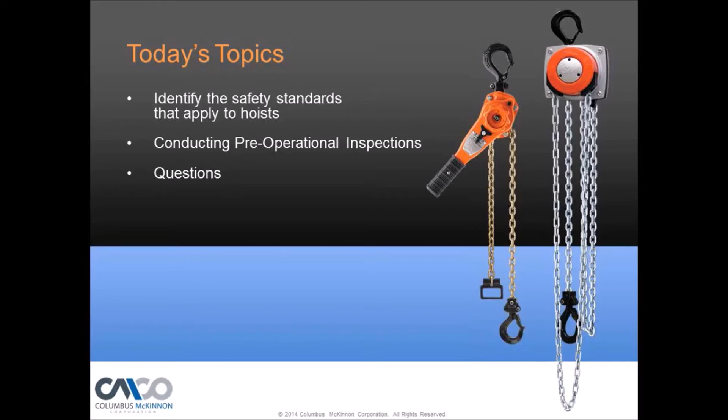All right, so let's get into the safety standards that cover hoist. I like to always start off with this because where do these safety standards come from, and how do I find out more about inspection of my equipment? The number one thing is to get the owner-operator's manual for the brand of hoist that you have and the company that made that hoist. That's the start, and then you want to refer yourself to the industry standard.

So if it's an underhung hoist, it's ASME B30.16, whether that hoist is electric, air-operated, or a manual hoist. And a lot of people don't realize that some of those large electric hoists fall into the same category as the small manual hoist. So whatever you do with the small manual hoist, you have to do the same thing with the large electrical or powered hoist, I should say.

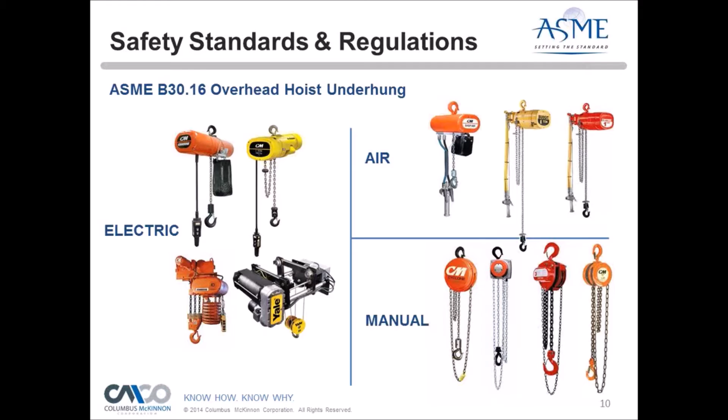For lever-operated tools, they fall under a different spec. It reads fairly close to the 16 spec. It is B30.21 for lever hoist. Whether you have a chain type, wire rope type, sometimes we can have a synthetic—instead of chain, we'll have a synthetic, almost like a synthetic sling for the lifting—and so that would all fall under B30.21. And it's important to know what standard your hoist equipment is.

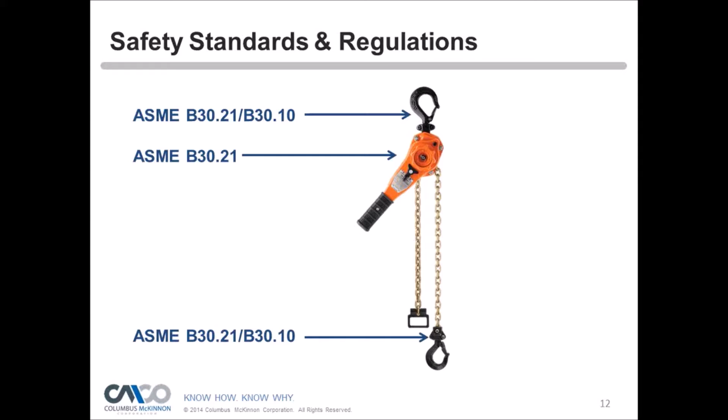It's interesting to note that when you look at a hoist, there are multiple standards that apply to it. So here, just a simple lever tool, we have B30.10 for the hook inspection and 21 for the lever hoist. So sometimes there are multiple standards for one piece of equipment, so you would need two standards to reference for the operation and inspection of that unit.

Let's look at a fairly simple crane, which is a jib crane here, which falls under the category of a monorail or an underhung, and that falls under the category of B30.11. So the inspection of that equipment would fall under B30.11. The hoist would still fall under 16.

And then if you look here, we've got B30.10 for hooks, slings, 9, 20 for below-the-hook lifting equipment, rigging hardware, 26. So we've got a whole library here of things that need to be looked at as far as inspection is concerned.

And the reality is your operator should be looking at that equipment prior to doing any lift, especially the rigging equipment. The pre-operational inspection of the jib and the hoist only have to be done at the start of the shift, but your rigging equipment should be looked at as well.

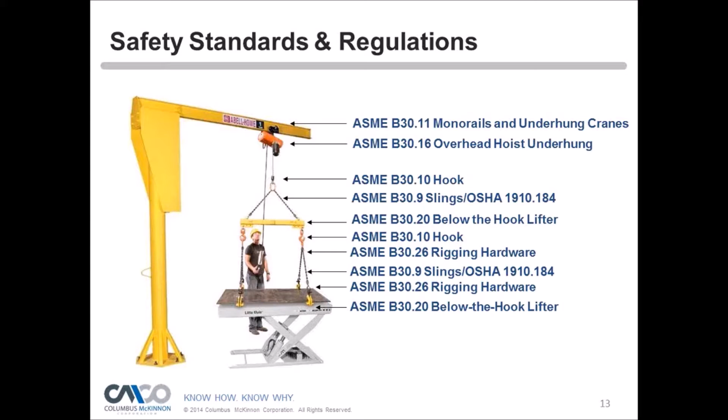So let's start the pre-operational inspection, what your operator should be doing. There are two general classes of inspection, and I want to briefly go over those so we don't mix up what this type of inspection is.

We have the frequent, also referred to as a pre-operational inspection. Records of these inspections don't need to be kept. You do them, train your people to do them, and we highly recommend they do it at the start of every shift. Obviously they're going to be on the ground, so visually they'll look at what they can see from there.

How does it differ from a periodic inspection? A periodic inspection is a very detailed inspection, and records must be kept. This is where someone actually looks at a chain hoist link by link, or the wire rope hoist through the entire rope, maybe gets up on a scissor lift and looks at the mounting and the torque and everything like that, and documents it—crosses the T's, dots the I's. That's what the periodic inspection is.

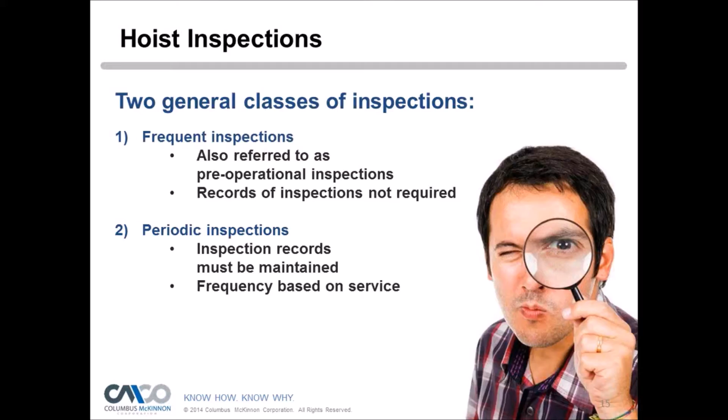How often do you need to do periodic inspections? For normal service, if you're lifting less than 65% of rated loads 15% of the time, you want to do an annual inspection. Heavy service, if it exceeds that normal service, at least twice a year. And in severe service you want to go quarterly. Severe service is abnormal operating conditions you wouldn't normally see—chemicals, heat, extreme cold, caustic environments, anything not normal. Then you want to look at that four times a year and document that periodic inspection.

Latches are required on hoisting equipment unless it constitutes a hazard, but for the most part they're required. Without the latch you might think everything's okay, but the hook could be starting to stretch, or it was overloaded—so the latch is a good indicator of that. It draws my attention and raises some concern, so I'd want to bring that to the attention of a competent person, someone trained to inspect or maintain this equipment.

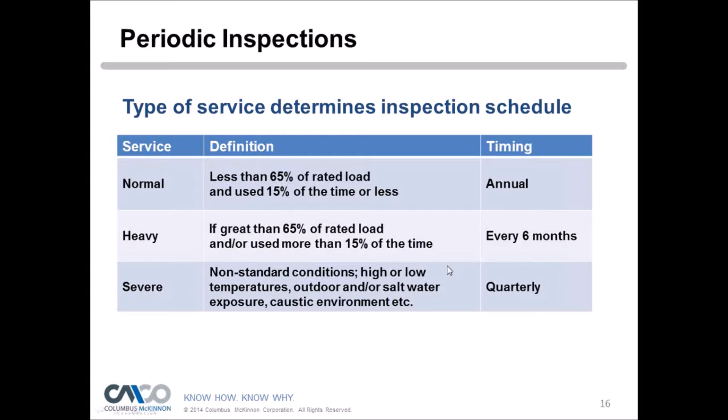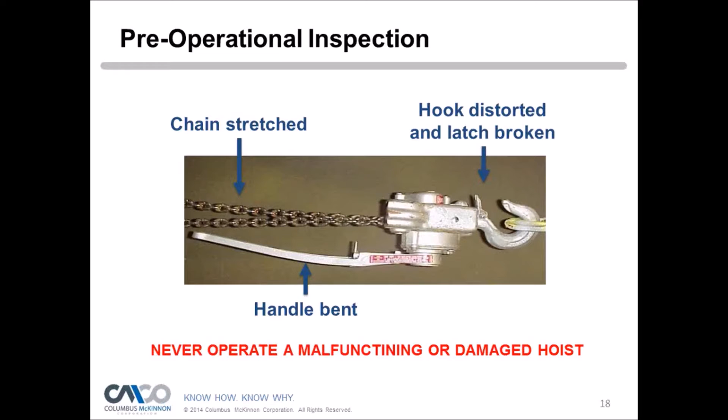Frequent inspections require no records, and we actually supply some checklists. We have our sales guys do some safety courses and supply them. We also sell a crane operator safety kit—we supply these, and you could laminate them and put them on your crane or your pendant so operators remember to do them. Something we're starting internally at CM is we're going to make all our operators do this and sign off every day.

It's not required, but we just want to do better than what the safety standards say. So first thing you want to do is make sure the crane is not tagged out of service, looking for safety and warning labels. They all need to be on there to be compliant, and it has the do's and don'ts. Your control devices, make sure the markings match what the functions of the crane or hoisting equipment are.

Again, the hook, we're going to look for damaged hooks of that nature. We're going to check our limit switches and be sure they're operating properly. A limit switch is basically a shut-off switch where you don't want to lock into the bottom of a crane or hoist, and sometimes they're often in the lowering direction as well, so we don't want to hit the floor and possibly spool out our wire rope or remove our chain from the hoist and have it come down on the operator.

Not all hoists have limit switches. Top limit switches. Some have slip clutches which act as a limit switch. So we need to know what type of hoist we have and what are the limit switches in the hoist and how they work. And your operators need to be trained on that.

Unusual sound. Maybe they hear a sound they haven't heard in the past. Hey, I never heard that sound before, so that's something I would want to bring to someone's attention. It's a weird sound, it just doesn't sound right. That should be a red flag. Is there oil leaking out of it?

The hoist chain, as best we can, check the integrity of the chain, kind of look around, and see any nicks, gouges, heat damage, things of that nature. We'll get into that a little bit deeper.

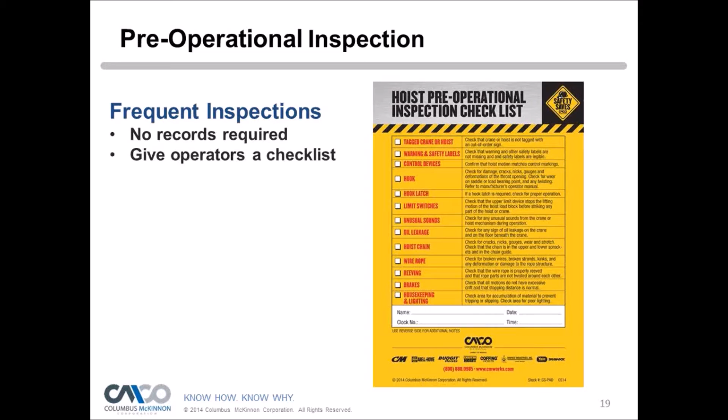So that's the checklist, and we're going to go dive a little bit deeper into that today.

So lockout tags. Never want to operate a hoist that's been tagged out of service. I know sometimes third-party inspectors will come in and tag things out based on what they see, but they have no authority to remove it or anything like that. They'll just tag it, and some places, honestly, will remove those tags because they have work to do and they'll continue to use it. That's a bad situation.

So if there is a lockout tag or a tag that says danger, do not use it, there's a reason for that, and you want to see the appropriate person or safety personnel, maintenance crew, and ask what's going on. Usually they will know about it.

Make sure that everything has a rated load, that you understand what the rated load is, and find what the weakest link in the system is. You could have a monorail system that has a 2-ton crane and the monorail is rated for 5-ton, and you can't lift 5-ton, right? You have to find the weakest link.

Or your rigging might be weaker than the entire system. You might have an eye-bolt that's only good for 500 pounds. So that's things we need to look for.

Identification. You may not be able to see it from the floor, but the make, model, serial number should pretty much jump out. Even if it's not visible, you want to bring that to the attention of the maintenance crews. You might not be able to read a serial number from the floor, but certainly you'll be able to see the manufacturer of that unit and be aware of where the serial number tag is so that you can see that it's there. And again, all warning labels need to be on there, and be sure that it would be a certified hoist.

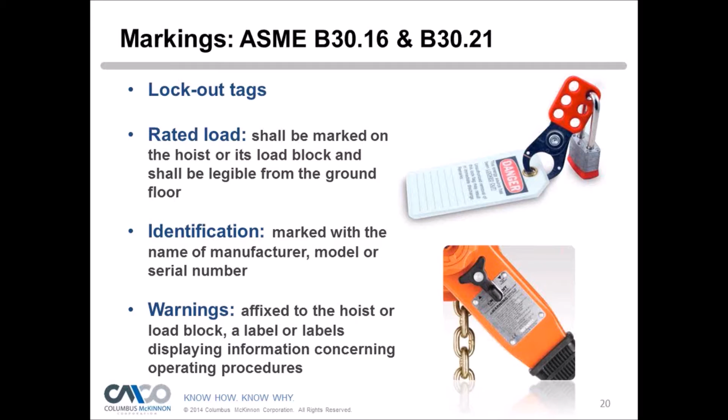Let's look at a powered hoist here, an electric hoist. You have pendant controls. And again, these things kind of are out there flapping in the breeze, so they can get struck by tow motors. They can be crushed between loads.

Depending on how you're standing, is it my right? Which right is it? Is it the right from the control panel? So this is not mandatory, but what I recommend people to do is put north, south, east, and west. That's pretty clear. Mark the bottom of your hoist or somewhere on the building where they can see north, south, east, west. Then it's definite, right? So it's not relative, depending on how I'm standing. That gets very confusing, but that's common in pendants. So you may want to relabel that north, south, east, west. That's just a recommendation to eliminate some confusion.

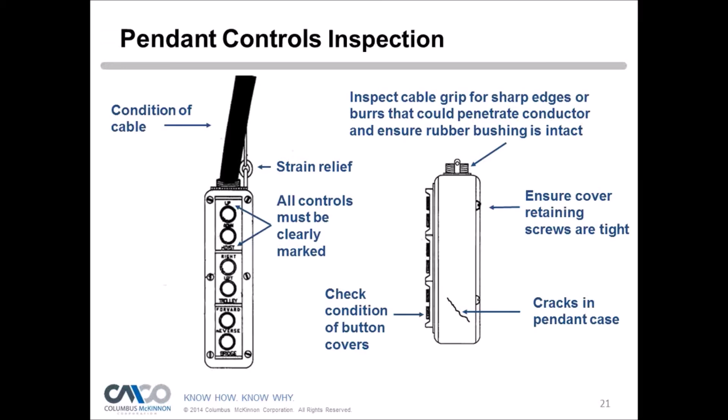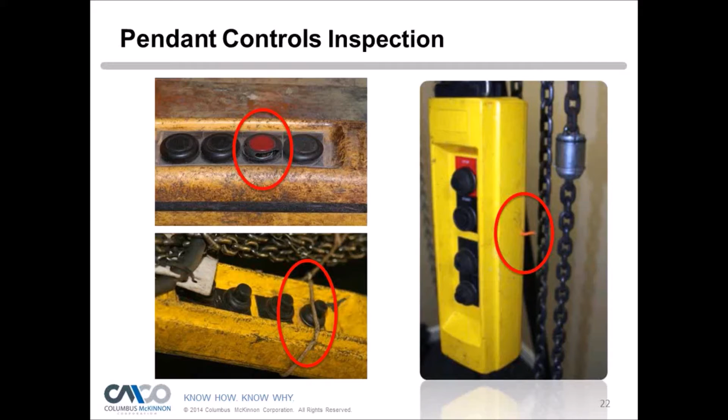Anytime you're operating, this goes to good housekeeping. You want to be sure that there's nothing beneath the crane, materials that are subject to damage. In the event there's limit switch failure, the block must not be allowed to contact the trolley, drum, or sheave. So if you're doing a pre-operational check and you think it's going to hit the bottom of the hoist, stop and figure out: is the limit switch malfunctioning, or is it one of the hoists that have a slip clutch? We don't want to test a slip clutch on a pre-operational inspection every shift - that's something that should be done periodically. So we want to find out what type of hoist you have, or it could just be that the limit switch has failed and we want to get that replaced.

A question for everybody: what type of inspection requires documented records that it was done? Is it frequent, periodic, operator, or rigger? Again, what type of inspection requires documented records that it was done - frequent, periodic, operator, or rigger. And for those of you that are on an iPad, unfortunately you won't be able to vote. You can shoot me your answer on the Q&A pane and I can add it in.

It looks like right now, Peter, about 60% have voted. And it looks like 90% periodic, 5% frequent, 5% operator. Can you go ahead and share with us what the answer is? Yeah, it will be the periodic inspection that is the documented inspection. That is the full detailed inspection from top to bottom where you dot the I's, cross the T's, you have paperwork on it, or you do it through electronic means. But yeah, it's definitely the periodic. Okay, thank you.

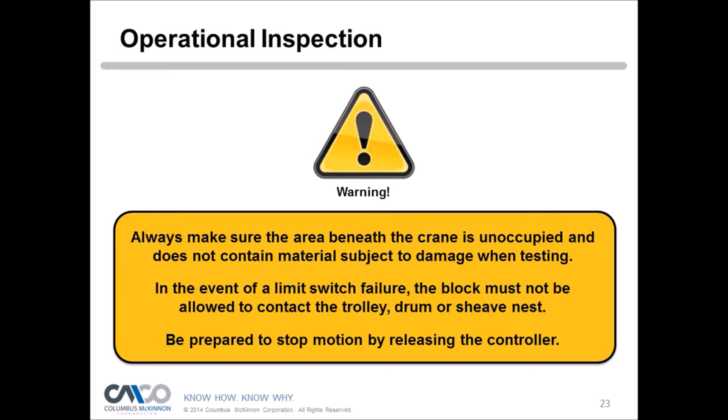So let's talk about operating controls. If I hit the up button, the hoist goes up, and it goes down. I hit the trolley, whether it's left or right, it responds to the exact function of what the pendant says. If it does not, that's a very dangerous situation, especially in the hoisting aspect, because we're running through the wrong circuit, so we can technically not have limits at that point. Therefore we can break limits, we can run the hoist chain out of the hoist, or the wire rope out of the hoist, or ram into the hoist and break chain or break wire rope, and that's a dangerous situation. We definitely don't want to switch buttons up or have buttons relabeled - it has to be fixed at the hoist and make sure that it responds exactly the way the pendant is worded. Again, if there's a warning device such as a horn or a light, make sure that that's working properly.

If anything fails to operate, again, contact your maintenance and they will get the proper people in place to fix that situation.

Let's get into hooks a little bit deeper. Hooks fall under the spec of ASME B30.10, and you can see here some extreme cases of hook failure, and then some not so extreme. So in that bottom picture there, that's what I'm talking about. If you didn't have that latch, that hook may seem okay. It doesn't look too bad. To me, I probably wouldn't be able to detect it either, but for sure that has been stretched or overloaded. It needs to be replaced, and that latch is telling us that.

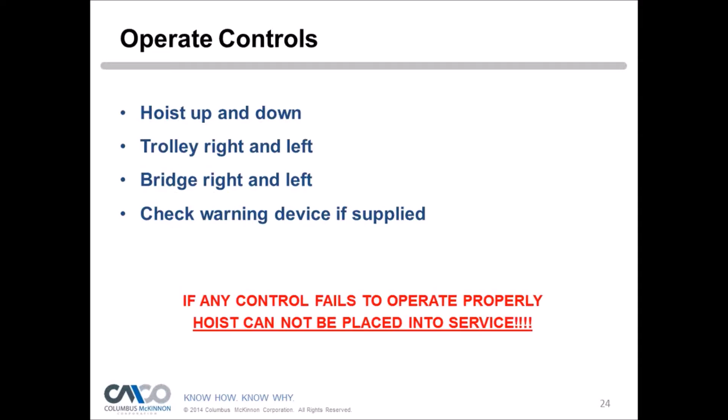So that's why it's so important to have the latch. Not only is it a means to secure onto your loads, but it's also a nice visual for the operator to jump out and say, hey, something might be wrong here. And it's required on hoist.

So look for any deformation. Throat opening, 5% not to exceed a 1/4 inch, or what's recommended by the manufacturer. So ASME, that's the 5% or 1/4 inch. Manufacturers always have theirs published in their books as well, so if you know that you have that manufacturer owner's manual available, look in there. What you should be doing is if you haven't done so already, you should be documenting your throat openings, and you can put that usually on our owner's manual. You can document right on the owner's manual, or you can do it in your own system. And so when the next time you go to do your periodic inspection, it should match. And if it's starting to get larger or something to grow, something went wrong, and that is a telltale sign that we should get it replaced.

Any wear exceeding 10%. So if we have any wear areas, we're going to see it. Mostly we're going to see it in the saddle where everything connects to, so we want to look at that as well. And then sometimes we can have nicks, gouges, things of that nature. So those need to be looked at as well. And the severity of them depends how severe they are and what the locations are. Again, your operator or crane operator is really not trained in inspection, but if they're seeing a nick or a gouge, whether it's superficial they think, if it's causing them concern, you want them to bring it up to the maintenance group.

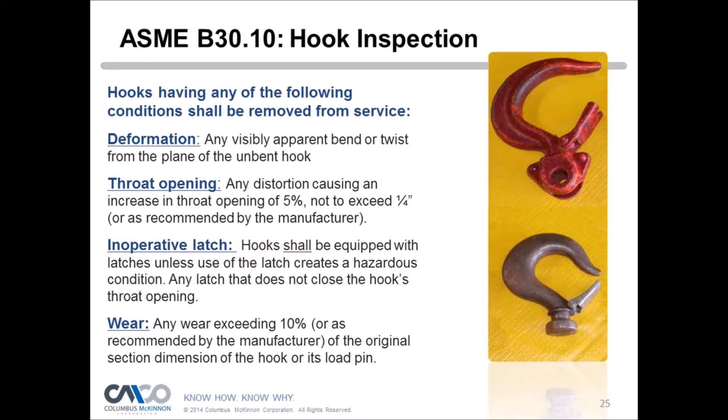So here's a hook that's been intentionally damaged, but it was not for a bad reason. It was for a good reason, but the outcome after they did it was bad. They put X marks on the hooks so they could have a point to measure on the hook, so that they can record it for periodic inspections. But in putting those marks, they put a stress riser in the hook and damaged it in the process. Some crane hooks have dots or raised surfaces where you can measure, others do not. The owner's manual will tell you where to measure. So in this case, the intentions were good, but the outcome was bad.

That hook had to come out of service. And then you can see field modifications that someone did in that picture there, which is pretty extreme. We don't want to modify a manufacturer's hook. So we're looking for any type of damage, anything that's causing us concern. Definitely bring it up. Tag that hoist out. You don't want to operate the crane. Tag it out of service and bring it to the attention of a qualified person or a competent person.

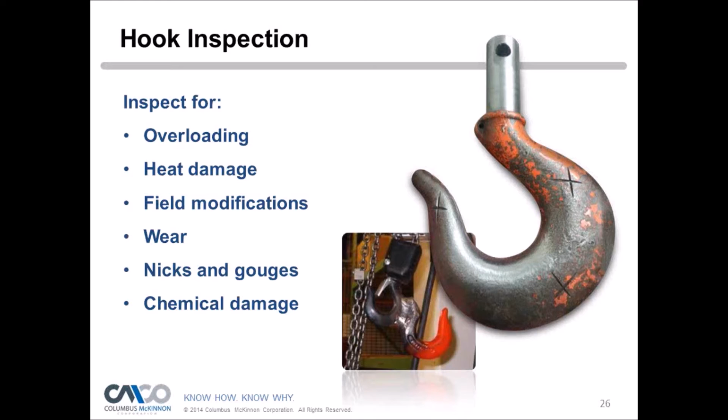Hooks should rotate freely without any load, and that's important because we do not want the chain or the wire rope to twist. We want the hook to rotate so that it can orientate itself to the load, and if it can't, it's going to twist up your chain or wire rope, and that's going to cause the hoist to jam up or to damage your chain and wire rope. So those hooks should definitely be rotating freely, and if it's not doing that very easily, something's wrong.

Okay, I have another polling question to ask. What ASME standard covers manual and electric underhung hoist inspection? Is it ASME B30.9, ASME B30.10, ASME B30.16, or ASME B30.26? Which one is correct?

Oh, we're really split on this one.

Go ahead and take a guess. The answers are all over the place. I'll give it another couple seconds.

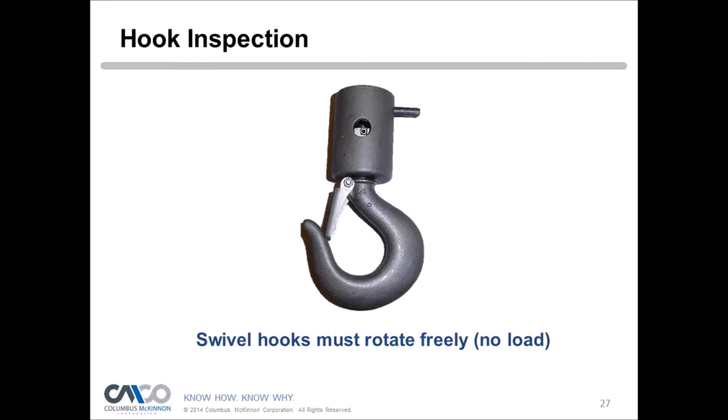All right, Peter, it looks like about 75% have voted: 4% voted for 1, 35% for 2, 56% for 3, and 6% for 4. So again, the big bulk is between B30.10 and B30.16.

So you want to share the answer? It's actually B30.16 for the hoist, and in that document it'll reference B30.10, but 16 is the document for the overall hoist inspection, which you would also have to get B30.10 if you wanted to learn more about that hook inspection. So 16, if those of you that answered 10, you were a little bit right, but it is definitely 16.

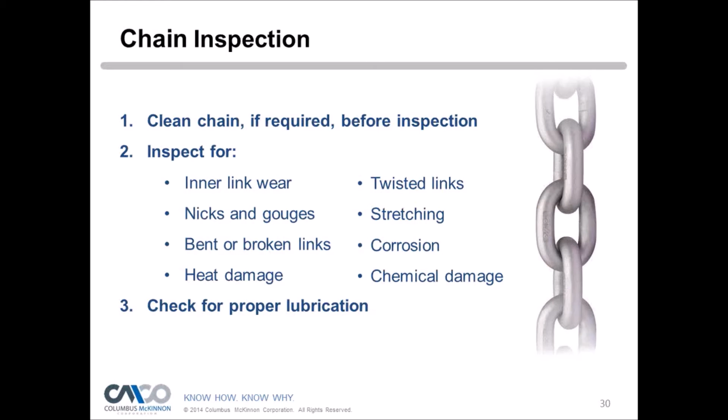So there's some visual examples. Again, very extreme, but we do want to show you some visual examples of what damaged chain looks like. It's that inner link wear that's going to be more common than most of these, and possibly nicks and gouges too, if they're running up near sharp corners. The hoist chain should never touch anything, and it should never be used to rig.

Peter, I've got a quick question. What type of chain is used in our CM electric and manual hoist?

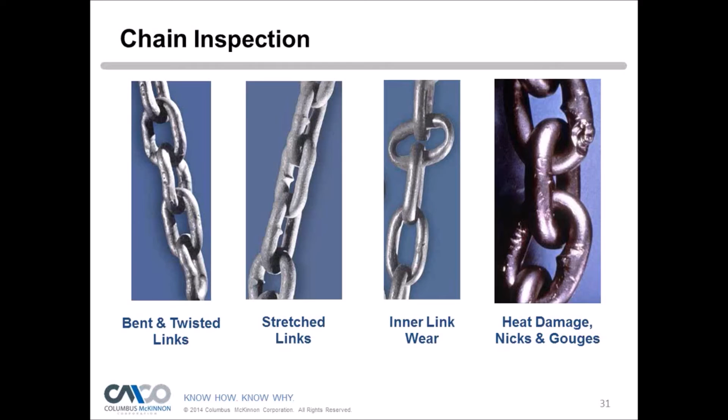That's a good question, and I didn't bring that up in the slide. Star grade chain is what we use in our powered hoist, and that's important. Star grade chain is a specially engineered chain by Columbus McKinnon. It's got a high case hardness because it runs at fast speeds over a lift wheel, so it can resist wear and heat. It definitely needs lubrication, but it's not like rigging chain. It stretches very little, maybe 3%. You don't even see it.

Rigging chains can stretch up to 20%. That's required by ASTM, but we're getting about 27% stretch in rigging chains. Hoist chain can't do that, and we don't want it to, because it has to go through lift wheels. We need it dimensionally stable. That's why we never rig with it.

Our manual hoist uses what's known as disc grade chain, a specially formulated chain for manual hoists, which is a through-hardened chain. But that's a good question. The hoist chain is not the same type of chain used for rigging, and the hoist chain should never come in contact with loads.

Okay, thank you, Peter. Thanks for the question. Wire rope inspection: if you have a wire rope hoist, they're looking for broken wires. 12 randomly distributed broken wires in one rope lay, or 4 broken wires in one strand, is cause for removal from service. If you're not familiar with the term rope lay, it's the distance one strand wraps around the core, the horizontal distance. That's a rope lay, and we're looking for broken wires there.

So again, the operator may find some broken wires. You may tell them, hey, if you see any broken wires, bring it to our attention, and let the maintenance crew or the people trained in inspection make the determination of whether that wire rope needs to come out of service.

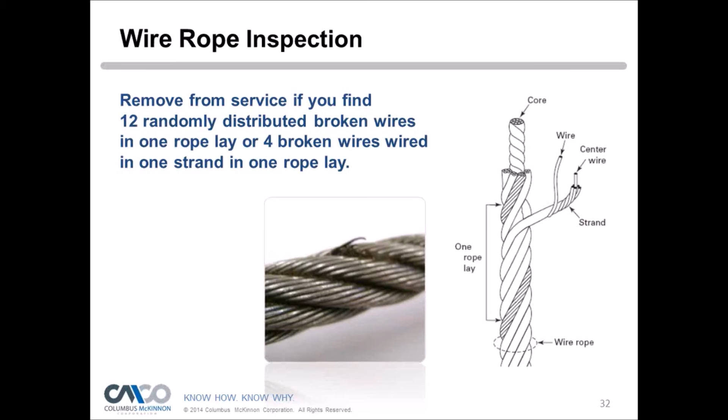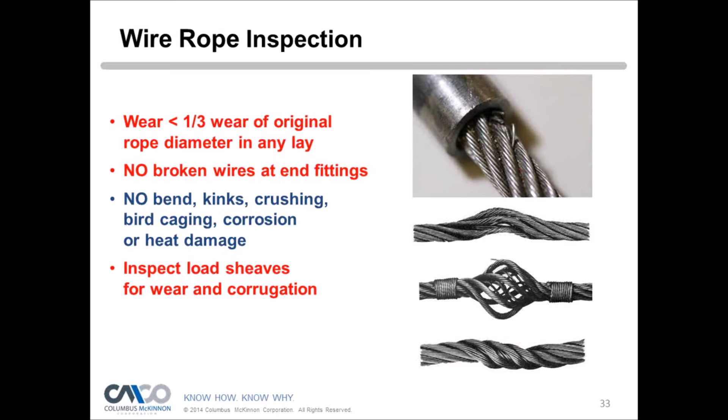Lubrication is definitely needed for wire ropes. Wire ropes articulate when they move, so without lubrication they can't articulate very well, and that's going to cause a kink, and a kink's going to cause broken wires—again, a compounding effect. So again, it all starts with the operator. If the operator recognizes, hey, we're running dry here, we need to get this lubricated, you can look in the O&M manuals and they will tell you how to properly lubricate.

Web strap hoists: wear, cuts, UV degradation. These hoists are used outdoors a lot, especially by linemen, so they're subject to sun and heat UV damage, so they can fade, and that weakens the materials. Any heat damage, distortion, no knots, excessive grease, oil, grit, and dirt, because that grease and oil can attract dirt and material, and that can start breaking fibers, so we don't want that.

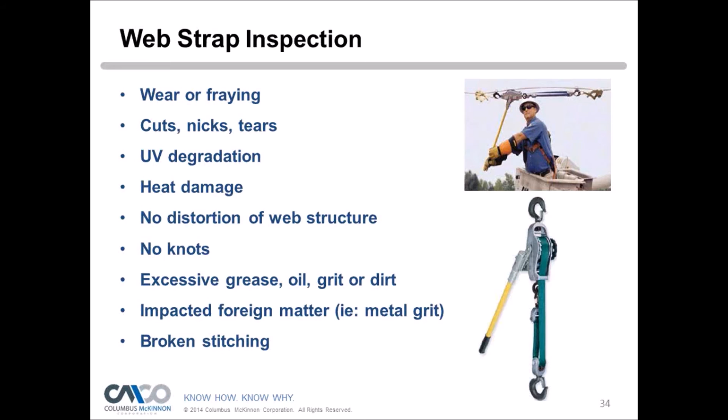And then safety end stops—we want to be sure powered hoists have them, and wire rope hoists are anchored properly. For wire rope hoists, I'm not sure if I had a slide on this, I might be getting ahead of myself, but at least make sure there's 2 wraps of the drum on a wire rope hoist. In the lower position, there should be at least 2 wraps left on there. If there's not, that's a problem.

For chain hoist, we want to see a safety end stop or anchor to the hoist itself to be sure that it's properly going to be there, it's the last resort. So manual hoist, we're going to have end stops and anchor the hoist. Electric hoist, we can have an anchored hoist, or we're probably going to have a fairly large end stop.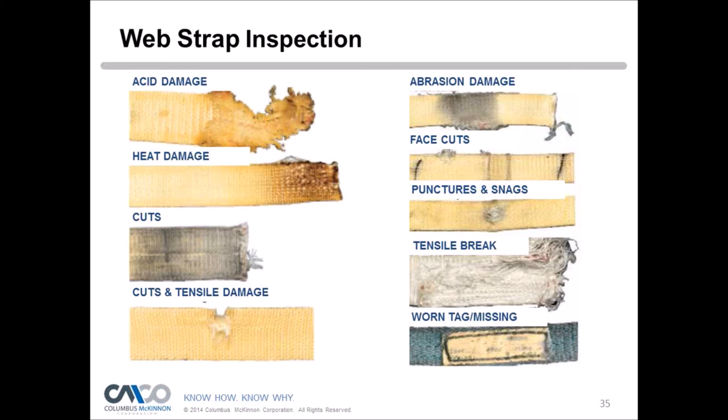In the event the limit switch doesn't work, that's our last fail-safe, so that we don't run the chain out of the hoist. That happens more than I care to admit, where crews installing forget to put those end stops on and don't set the limit switches, and the operators aren't trained. Then one day they run the chain out of the hoist and the chain falls on them, which is not good.

Operators want to check the brakes for lever hoists, 100 pounds times the number of load supporting parts of chain. So a single reeve of chain, 100 pounds; a 2-part reeve, 200 pounds. Electric powered hoists are 50 pounds. Why the difference? Lever hoists need a little bit of force to close the brake, and that's why it's 100 pounds, whereas underhung hoists don't need that.

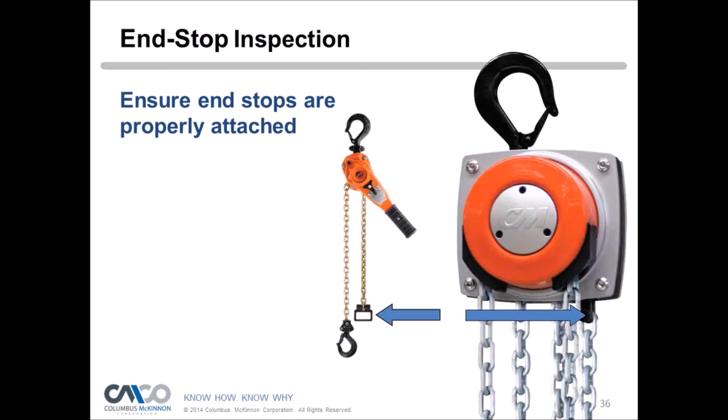So it's 50 pounds times the load supporting parts of chain or wire rope, and you can find relatively light loads in any area. An operator can easily find that to check brake functions, and that doesn't take long. You just raise it up a little bit, look at it, see if it's drifting, and if it's not, we're good to go.

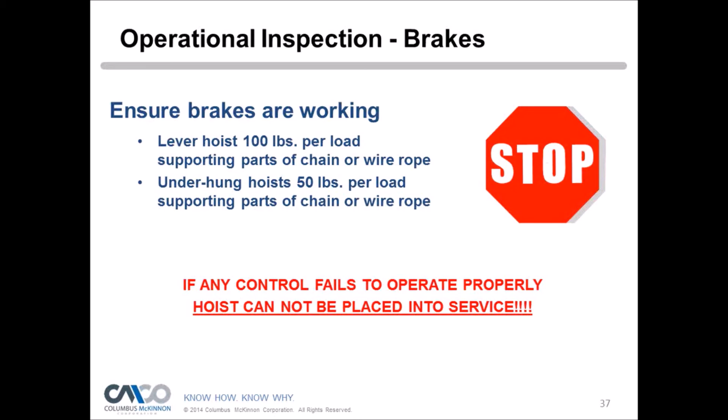With synthetics, you can do the same thing, but again you'd have to protect from sharp corners and things of that nature. Operators should be aware of that, making sure that's happening. That's usually for temporary connections. If it's a permanent connection and that's how you're doing it, then something's wrong, you should get it properly mounted.

So you think you've figured out all the sling angles, you know what you're doing, it comes naturally to you, you've been doing this for 20 years. You ever hear the 20-year guy? 'I've been doing this for 20 years, don't tell me what to do. I've been operating this crane, this hoist for 20 years,' and they don't want to hear it. They think they know everything, and nothing can go wrong, right?

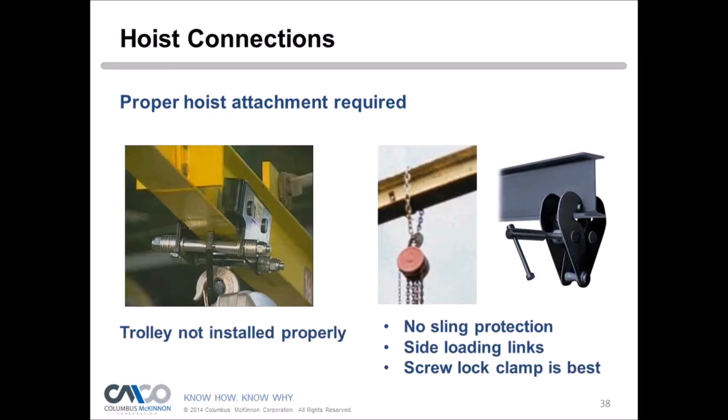My only concern with that is, obviously, the power supply. No, I don't have a problem with that. That's a good practice, and they're certifying that everything's working properly and weeding out anything that's damaged. So that's good.

There's nothing wrong with that, again, another set of eyes is good. This doesn't have to be documented, but they should still be trained to look at stuff, in case maybe somebody missed it. People are human, and someone could miss something. So I do recommend they do their own check.

Okay, of course, you got to have experienced people rigging them up and make sure they're rigging them properly. Okay, thank you Peter, and thank you Benjamin.

Next comes from Lauren: is there a way we can get the hoist pre-op inspection checklist as a reference for our technicians? Is that something we could share via PDF file, Peter? Yeah, absolutely, yep, absolutely. That's nothing proprietary, it's not priority, so we certainly could share that.